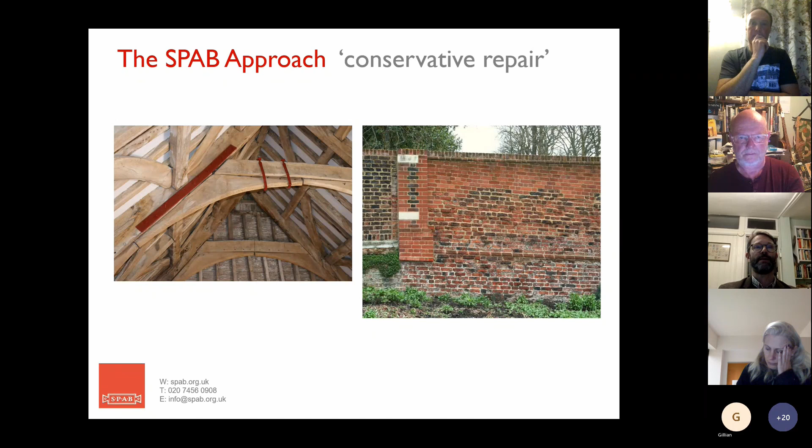So let's move on then to the Old House project. This is just a quick introduction from me, and then I'll pass on to Johnny to explain about some of the actual work that's been happening over the last couple of years.

So in the past, the SPAB was the owner and repairer of many historic buildings. Just one example is that on the left - you may well know it extremely well or have passed it on a regular basis. It's the Wealden Hall restaurant at Larkfield, repaired by us, but sold on many years ago and now a thriving restaurant. But in recent decades we moved away from this kind of activity. We were focused on advice giving and on training activities, and this had rather taken us away from the practical doing of things.

So in 2016, the SPAB took a significant strategic decision that it wanted to take on a new demonstration project as a means of showing what we were all about. This was the catalyst for a 2-year nationwide hunt to find the right building until we finally alighted upon St Andrews at Boxley. After a lot of thinking and some careful valuations on both sides, we agreed a purchase price of £60,000, which was either a lot or a very little depending on your perspective. But it was essentially a fair price, agreed by both parties as the right money for the building.

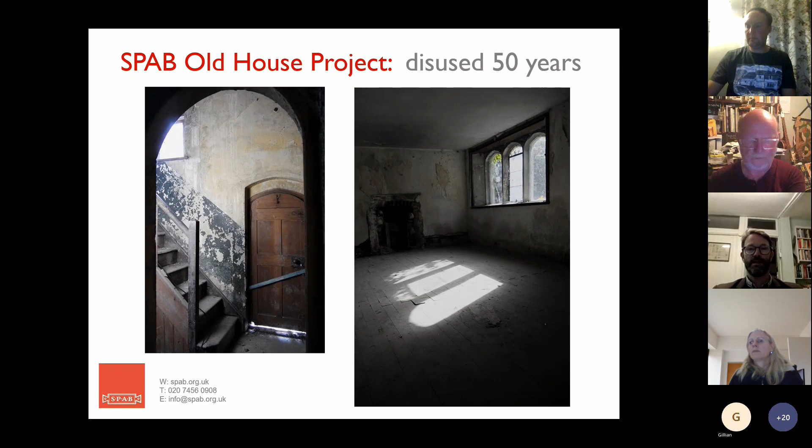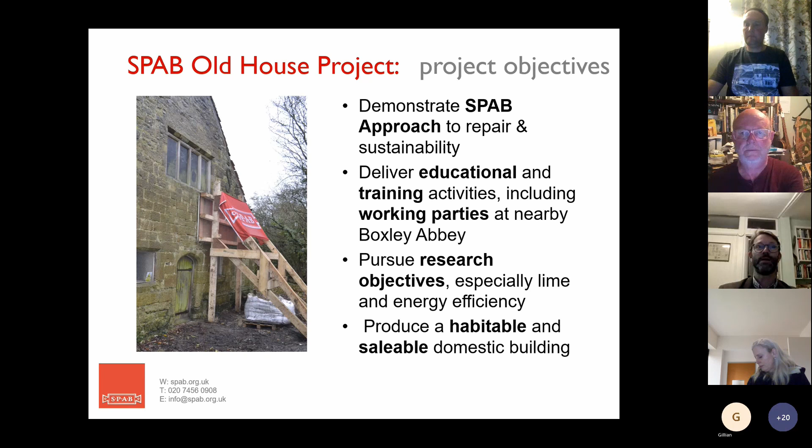So our objectives were to deliver several things over a 5-year period. Fundamentally, we wanted to demonstrate the SPAB approach to building conservation and sustainability too. We wanted to do as much educational work as possible, and that's where things link in with the working parties at Boxley Abbey. We wanted to pursue research objectives, especially around lime production and energy efficiency. And ultimately, we had to produce a habitable, saleable building in order to get the Society's money back.

So just a quick bit of context. St Andrews stands very close to Boxley Abbey. The precise relationship between the Abbey and St Andrews Chapel is still being explored, but it seems clear that there is a very strong historical link.

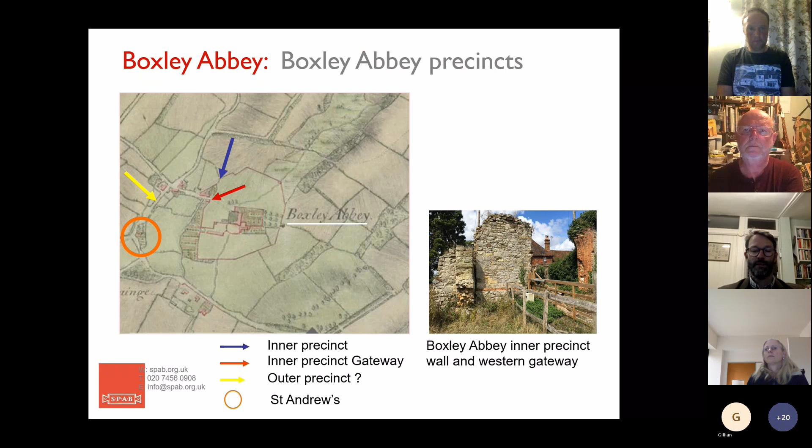Quite likely, Debbie may like to comment on this in due course, but quite likely is that the chapel was a reliquary building holding a saint's relic linked to pilgrimage, which was central to Boxley Abbey's activities. For me too, you can see the chapel ring there in orange on the left-hand side, and the blue arrow indicates the surviving inner precinct wall, but for me, very probably St Andrews stands on the line of the outer precinct and former outer precinct of the Abbey itself.

As you may well know, at the dissolution in the 1530s, the Abbey passed to the Crown, and shortly afterwards was handed over to courtier Thomas Wyatt, who lived, of course, at nearby Allington Castle. So a very obvious reason for him to want to acquire the Abbey's lands for his family.

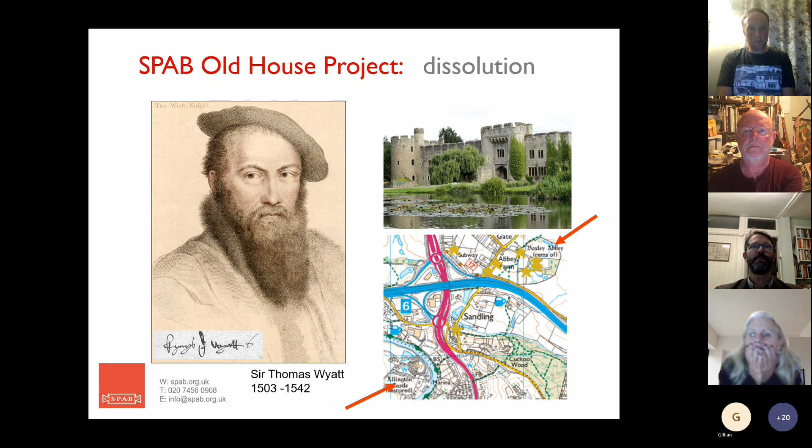Then followed a long period about which we're still trying to find out more, but pretty clear is that St Andrews just was part of the Boxley Abbey estate, and this position continued right on through until the late 1960s, when the chapel was finally sold out of the Abbey's hands.

So during our 4 years of ownership since 2018, we've done as much documentary research into the building's history as possible. In particular, thanks there go to Debbie Gocher, who's been an enormous help to us. But we've also drawn on local expertise. A historian called Robin Ambrose has been extremely valuable, and also others from KAS have contributed a great deal too.

So that's the background. I shall now hand over to Johnny, who will talk you through some of the investigation and repair work and planning and thinking that we've done to date. So, Johnny, I'll click forward the slides when you tell me to.

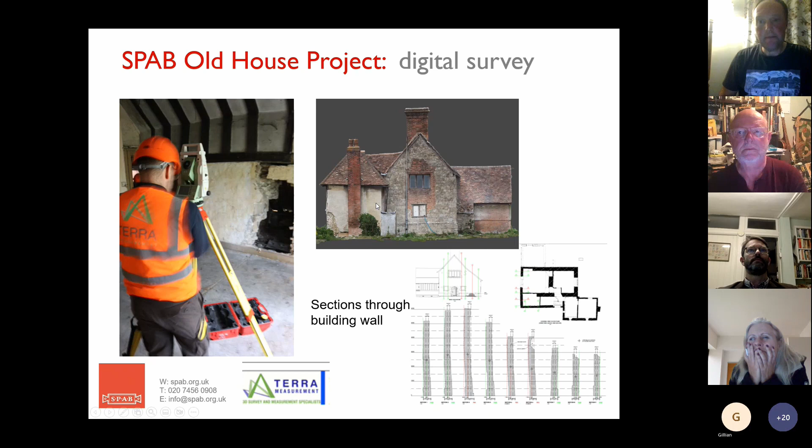Other people that helped us right from the beginning included Dr. Martin Bridge, who I'm sure some of you know. He's a dendrochronologist with a huge amount of experience trying to date buildings, particularly timber frame structures, which is what he did at St Andrew's Chapel and the Old House project. Initially he came in and undertook a dendro survey on the areas he could tackle, but having got a few question marks, he came back when we were undertaking repairs to the roof, and that opened up a whole new world, and galvanized some of our thinking and gave us a lot more information to work with.

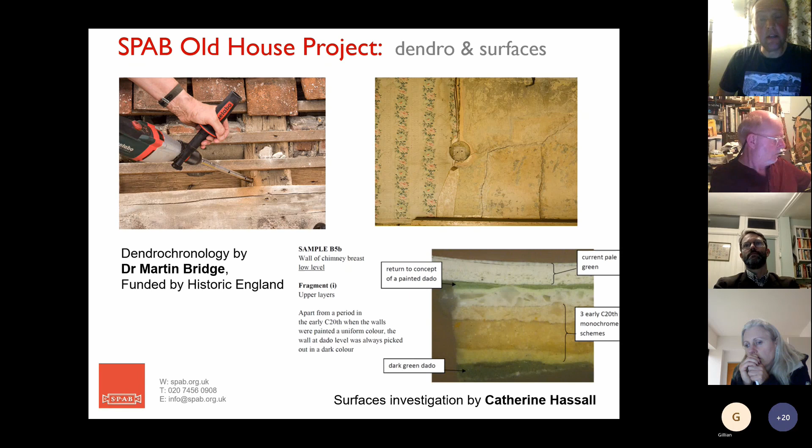We also had other people involved who looked at the internal surface finishes, and Catherine Hassall was the lady involved there, and it was fascinating to understand how many times and how often and when the surface finishes changed. As Matthew showed in the particulars and auction particulars, we think a lot of money was probably spent at the end of the 19th century, but after that there wasn't much change. So we're taking on a building that hasn't been lived in for 50 years, but is actually decorated in a way that was coming from the Victorian period, and it was a real time capsule in that way.

Next slide, please, Matthew. One of the first bits that we tackled in physical work was the roof. As William Morris says, fix a leaky roof, and that's exactly what we did. We had actually set aside money to renew the whole roof. We thought it would possibly need that when we were first looking and undertook a condition survey.

But through further investigations and understanding the building, we realised that the roof you could see in the early photos, with the family standing in front of the building and beautiful shots of St Andrew's Chapel in the background, was actually perfectly okay, other than where trees had rubbed against tiles and where repairs had been undertaken mainly due to vandalism. Manufactured tiles had been put in place of handmade tiles, and they had started to break down and delaminate quicker than the handmade tiles. So leaks occurred, and that rotted some of the roof structure, but really it was only very small amounts.

So we actually undertook trying to make the tiles ourselves using the clay from underneath the site. We realised when we needed 3,500 of them, mainly for the new post office roof, that was going to be impossible. So we went to William Blyth's, who are up in Hull. They have a 130-year-old coke-fired kiln, which is a very traditional way of burning tiles, and using their clay we produced 3,500 tiles. We had people sponsor a tile through the SPAB, and very gratefully a lot of wealthy members, I suppose, were able to help us. £25 was what you could pay for a tile, but some people paid nearly £2,500 for a tile. So that really helped us with the repairs.

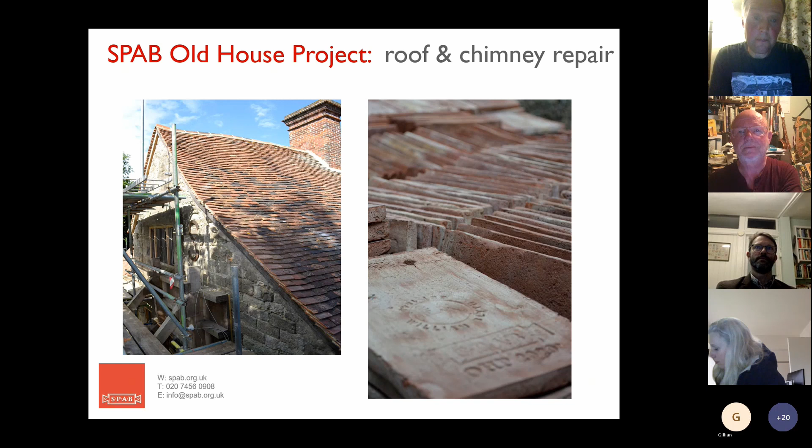Next slide, please. As you can see here, this is the roof works beginning. As Matthew mentioned, one of our ideas behind taking on the Old House project is education and training, so we very much wanted to involve as many people as we could, from students right up to the most experienced of building people. We had an extra wide scaffold which allowed that, and we also had access via a system of poles running along the ridges, which ladders could move across without touching the roof, doing as little damage to the roof as possible, but allowing access to the whole roof for repairs and for investigation purposes. The scaffold was up for a whole year, right through the process of repair and following as well, so it was a great education and training aid for us.

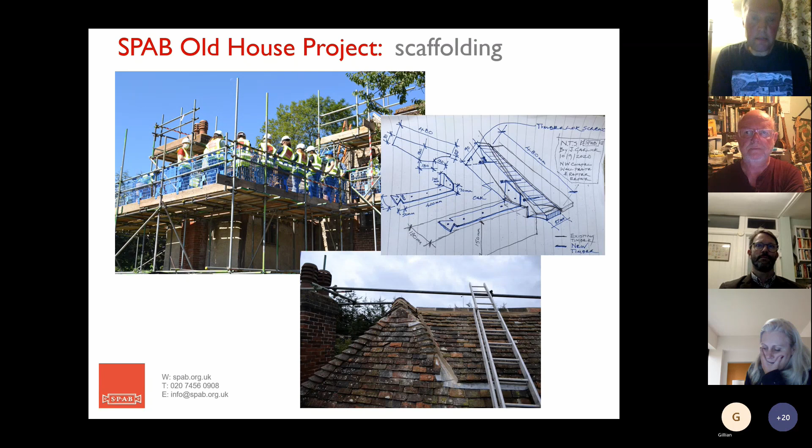The other aspect we undertook was analysing the mortar, both at Boxley Abbey and at St Andrew's Chapel, which we discovered to be the same. It was a feebly hydraulic grey chalk mortar taken from the North Downs, mixed with a building sand, a very soft sand that had been taken from the other side of the site where there is a sandstone ridge.

We did lots of trials with this mortar, and we felt that we could increase its strength without reducing its breathability. We were very lucky to be given 2 million tonnes if we wanted it, but we only needed a couple from the Oxted grey chalk quarry just off the M25. A lot of you probably know it. With those couple of tonnes of grey chalk, we then burnt it in a lime stabilised soil kiln, which is still on site and actually in use tomorrow.

That provided us with some quicklime, which we can then hydrate and then mix with the local building sand, which the Cistercian monks used, but also added in a little bit of crushed Kentish ragstone, one to give it a little bit more strength, but also to identify where we had been in the building. So as you can see here, we did lots of chimney repairs where it was needed, left the mortar where it was perfectly okay, but just where bricks and mortar had fallen out, we needed to fill it in and point it up with our own mortar. It's worked incredibly well, as it's feebly hydraulic. It's a pretty tough mortar, but it also, as I hope you agree, looks nice as well and matches in with the original Cistercian mortar that they used.

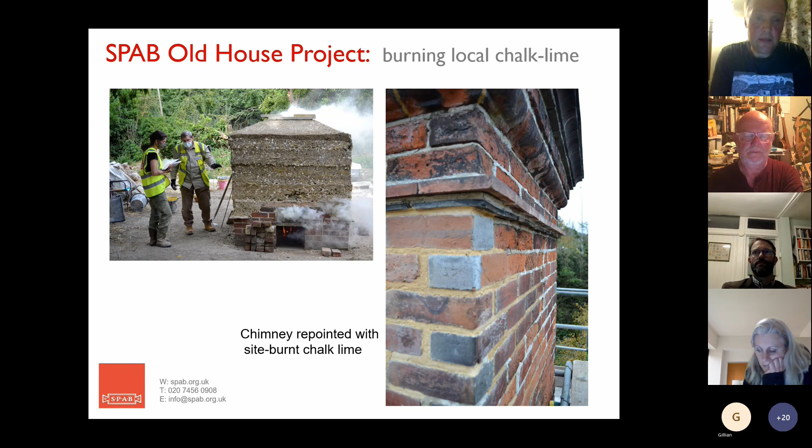Not just grey chalk have we tackled in the SPAB's OHP kiln, but also ragstone. Now the building, St Andrew's Chapel, is built from ragstone, a very common building stone, but very rarely was it used as a binder, if ever, mainly because it was impossible to crush it down to a size which you could then burn comfortably. So it was mainly just known as a building stone. But where we have Kentish ragstone on St Andrew's Chapel which needs repair, as in the surface has delaminated away and become quite soft, we needed to build it up with a mortar repair that was compatible. And what better way than to repair Kentish ragstone than with Kentish ragstone?

Now, these slides that you can see with the red banners on them are taken from our videos that we have produced over the last few years since working at St Andrew's Chapel and at Boxley Abbey. So please go and have a look on YouTube, under SPAB YouTube, and you'll see the whole process of us making the kiln, burning the stones, and then putting them on the building as trials.

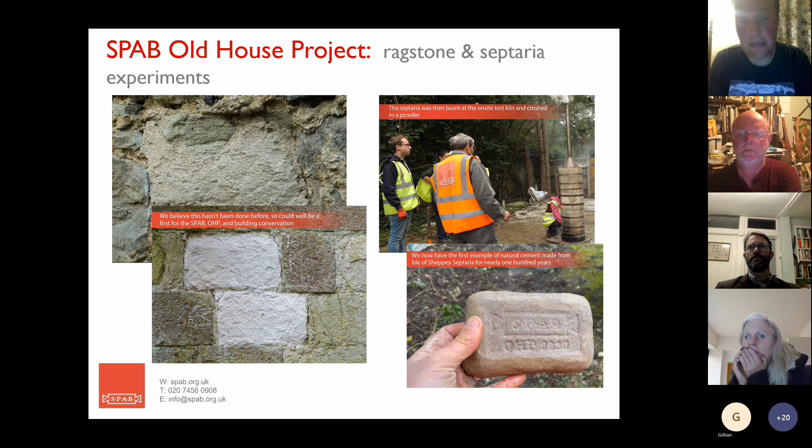Another fascinating side of our lime research and kiln research is that we had a go at taking some septaria off the beach at the Isle of Sheppey and burning it, crushing it down, and then making ourselves some natural cement, which you can see in the bottom right hand slide there. First time in a long time that had happened, and we hope that we can utilize some natural cement in the building as well, going forward. We feel that it's another local material that's been forgotten and a little bit misunderstood, and we wanted to make people more aware of the benefits of a natural cement, or a Roman cement, as many people might know it as. Next slide, please.

When we took St Andrews on as a project, we always knew that there was a bit of an easement issue across the site. We thought at first it might have been due to the M20 or Grange Lane or something along those lines, and then slowly, after we got the keys, discovered that we had a huge gas main that ran across the south side of the site, which pretty much fed most of Kent with gas. And the first day we stepped on site, the gas man turned up and said, 'Don't go anywhere near it.' Of course, that suddenly scuppered a lot of plans that we had for that part of the site.

But anyway, we took it on the chin and worked with SGN, who initially said don't go anywhere near the pipe work. But our architect said we really need to cross over it to form a driveway onto site, as the Boarley Lane entrance is too narrow and dangerous to access. So we wanted improved access from Grange Lane, which meant two years of negotiations and drawings.

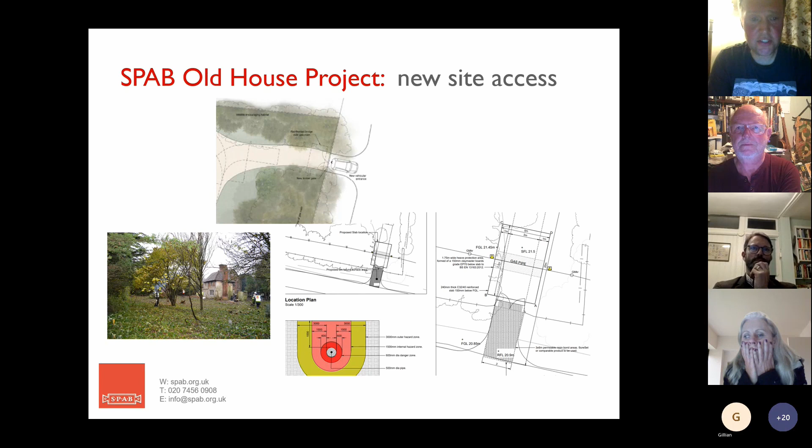The drawings were put together by the 36 Engineer Regiment in Maidstone, who used it as a project to design a reinforced concrete bridge to span this pipe. We got it installed with help from local volunteers and specialists we know, and had a lot of fun doing that. It now gives us access to the south of the site, and as you drive on, you get a beautiful view of St Andrew's Chapel in the distance. It was all worth it - just something we weren't expecting to do.

One thing we were expecting to do was deal with the fact that the M20 is 100 feet from the site, with all the noise and pollution that comes with it. When we went for planning application, Maidstone Borough Council were keen that we got further research undertaken on the effects of sound and air quality on our building, and how that would affect anyone living there, which hopefully someone will.

We were very lucky again - another local to the Sandling Boxley area came forward and offered to help. After a few conversations, we realised he worked for Socotec, a massive engineering firm, who took St Andrew's Chapel under their wing. From a structural monitoring side, soil investigation side, and environmental side - air quality, sound quality and acoustics - they've helped us.

On the left hand side is the original building, which gives some relief to the sound from the M20 on the north side. The other building on the right is a garage we're hoping to put in - it's a proposal we've got planning for now, but it doesn't exist yet. You can see there's a little bit of sound relief behind that.

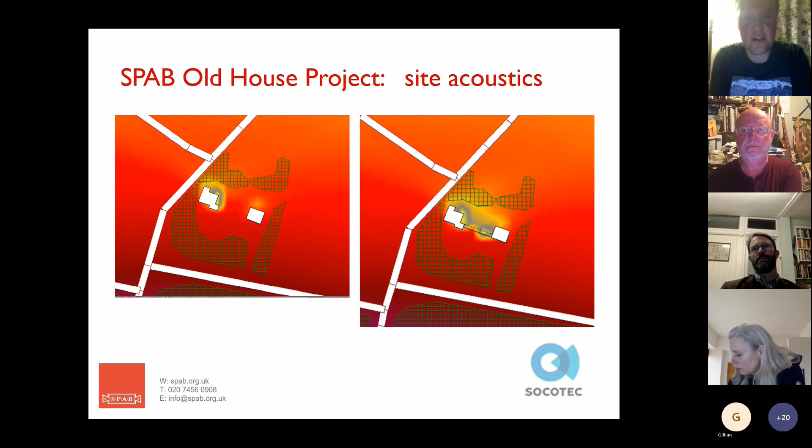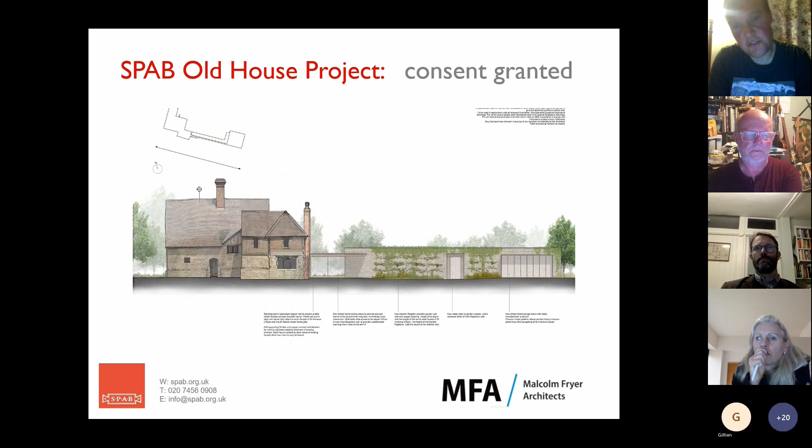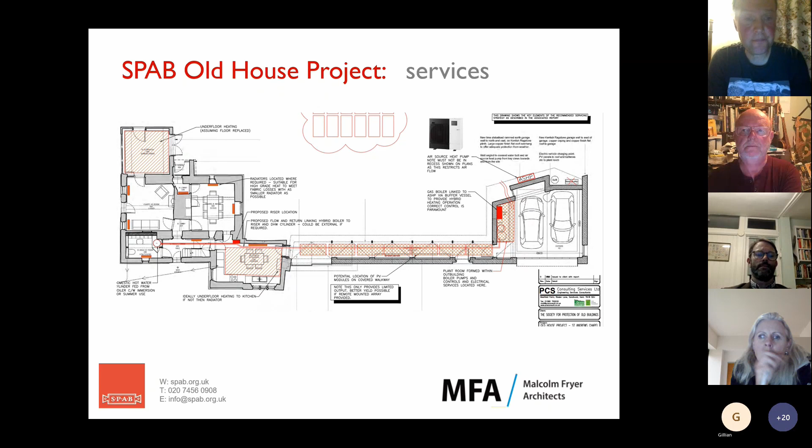We are looking at increasing the solar array. We've got a discussion with the services engineer very soon about exactly what we're going to put in, but we really want to make the building as self-sufficient as possible, utilising the south orientation of the site - possibly solar panels, a biomass boiler, or a gas boiler, and particularly air source heat pumps. We want to limit the effect of the services on the historic building, but make it sustainable and livable - a nice warm building.

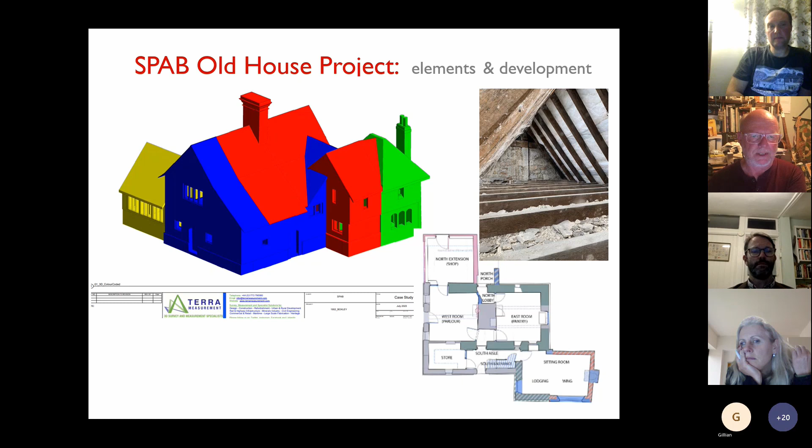If we go on to the next photo, please, Matthew. This shows a little bit more of the work that's been going on in the background. This is essentially what Martin Bridge has been looking at as the dendro specialist, funded by Historic England, looking at the building itself. These are the areas he was looking at, again with the same kind of tone - the primary elements, trying to get dates for the initial structure of the building, then the theoretical addition of this little square element on the southeast corner, and subsequent additions, the slightly later phases, so we thought, of the building.

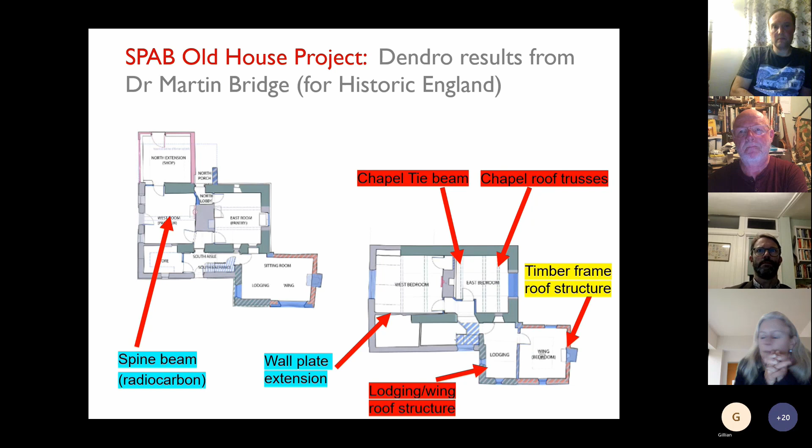Next slide, please, Matthew. Thanks. So initially we got the dates back. In fact, in the very first stage of the work that Martin did, he was able to successfully date the primary element of the structure. It's worth noting, as we go through these slides, it's a grade 2 star listed building. The listing describes it as probably late 15th century, with post-dissolution additions of various dates. It was rather good to get this date back of a felling date, let alone just a range - a felling date of 1484 for the primary structural timbers of the roof itself, of the chapel element of the building.

You can see, even in the plan there, the thickness of those primary walls exactly there. But you can also see that on that plan there is a big gap at the west end, which Matthew is showing you now, and the south wall, exactly where the pointer is, a little bit shorter than the other one. The north wall - we'll come back to that because it's got quite a few ramifications for the overall interpretation of the building. Next slide, please.

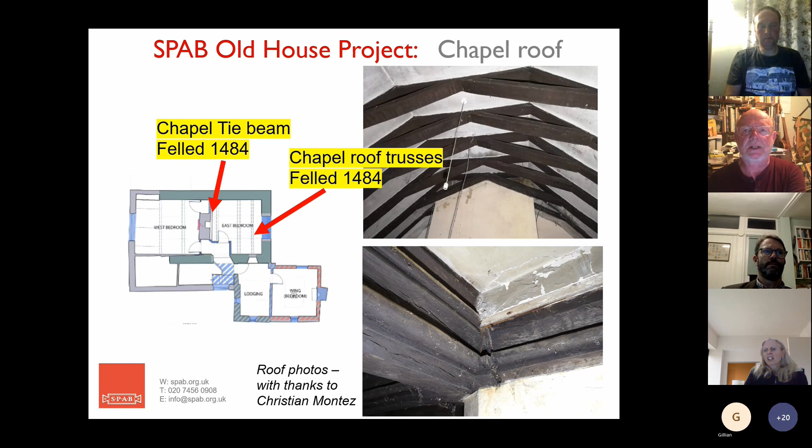When we had the scaffolding up in 2020, Martin was able to come back and do much more extensive sampling, which was invaluable in its own right, giving him a lot more dates. It also helped him go back to the first set of samples he'd taken a couple of years before, and he was able to use both sets together to get better results from the first set as well as these new ones.

So the timber framing of this, we thought and still do think, was the primary element, perhaps the priest's lodging for the reliquary chapel itself - the priest who would serve the chapel and keep watch over it. We didn't necessarily have felling dates, but we had a good range of dates indicating it was, at the very least, broadly contemporary with the chapel element. The date ranges of the timbers fall in the later 15th century, perhaps straying into the 16th, but broadly speaking it's contemporary with the roof of the chapel - and I say 'roof of' advisedly, for reasons we'll come on to.

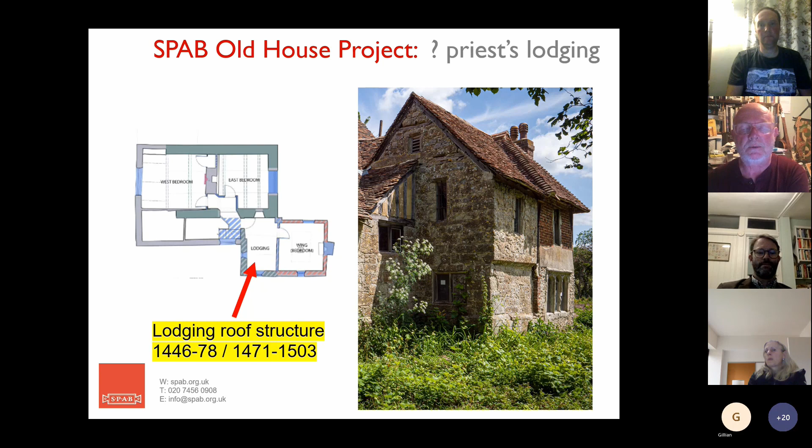It was when Martin got to the timbers of this added-on framed range at the southeast corner that things started to get really interesting, and we're still working through the implications. Although he got a range of dates rather than an absolute felling date, it seemed quite clear that the dates for this building were actually earlier, full stop, than the primary element - the chapel, and indeed the priest's lodging, if that's how it did function - which has set us all sorts of challenges.

We've been looking at whether the timber frame might have been reused in some way. I don't think any of us quite believes that, because it's not easy to reuse a timber frame from a separate building and import it into an existing one - it just doesn't work like that. We've come round to the idea this is genuinely an early part of the structure, and how we square the circle of a primary chapel being ostensibly later than a framed bay, which we thought was later than it, is slightly open to discussion, to say the least. I have my own ideas, I'm sure we all do - we can come back to that in a moment.

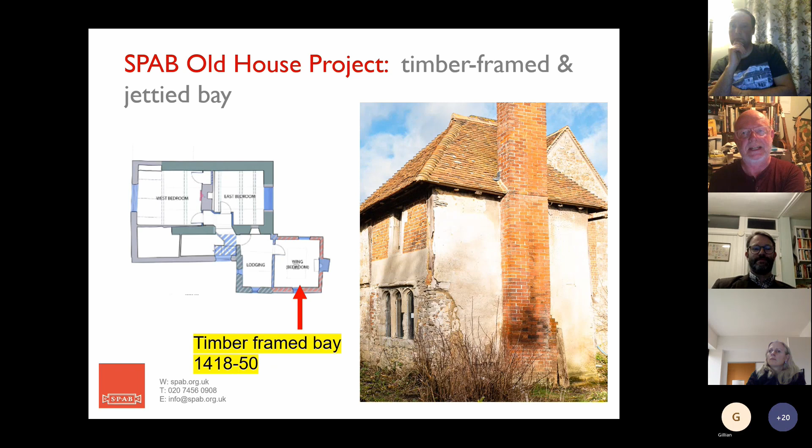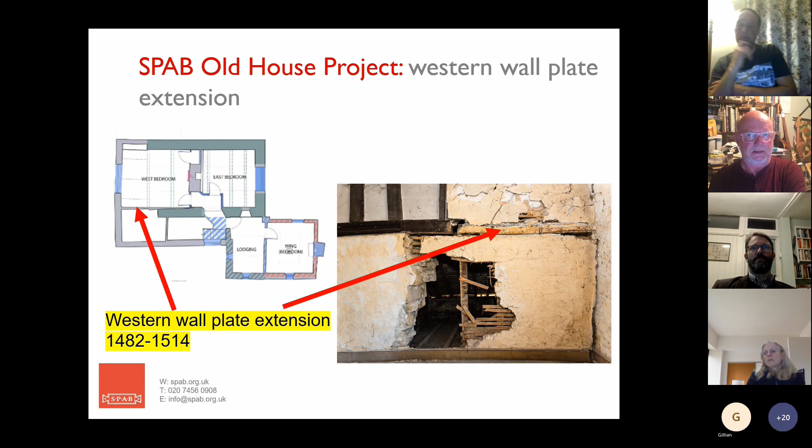Another surprise was when we looked at the evidence for the extended element - this bit where part of the building was added to. That didn't behave itself. We were fairly firmly in our own minds thinking this was a post-dissolution extension, for the phase when it becomes a private, broadly residential property. But with the date range in mind, rather than an absolute felling date, it's quite clear that the timber we've been able to date definitely falls within the medieval period. Is that a reused timber? Well, possibly, but the date we have is the date we have - all sorts of interesting conundrums for us to work through.

One of the final bits of the jigsaw was getting a date for the spine beam on the ground floor, one of the few parts of the extended, reused building which we were quite confident was post-medieval in date. For various reasons it wouldn't date by dendro, but Martin did get a radiocarbon determination from it, which shows it's in the late 17th or very early 18th century. This supports the idea that the insertion of a floor into the building, and probably the chimney stack as well, is substantially post-dissolution in date rather than just slightly - so that at least behaved itself quite well.

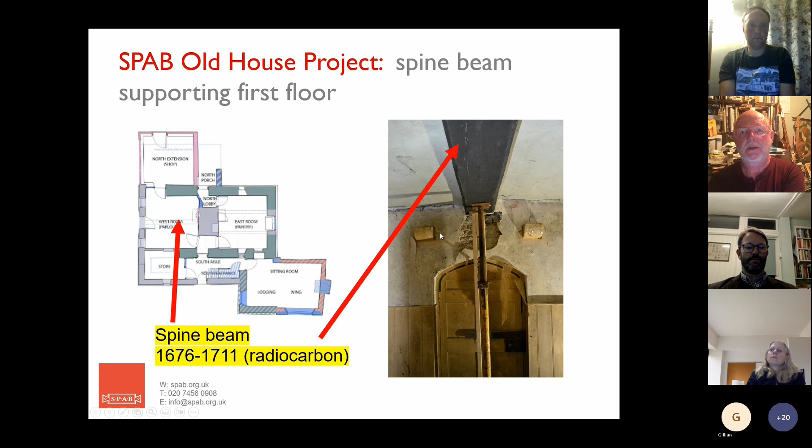Moving on from that, obviously that's just been one part, and alongside all the dendro dates there's been continuous survey work going on. At the moment, work has been happening in the last few days on further opening up the interior of that same southeastern corner of the building, with fascinating results which I haven't even seen yet, let alone can interpret for you. But it's a building which is slowly but surely unfolding its secrets before us.

And also a series of test pits - I think we're up to 19 test pits and one large trench so far. The geophysical survey on this site wasn't tremendously successful, partly because it had only just been cleared at that stage, so there was still quite a lot of metal debris on and close to the surface. It was also an extremely dry time, and the resistivity didn't really respond very well to that.

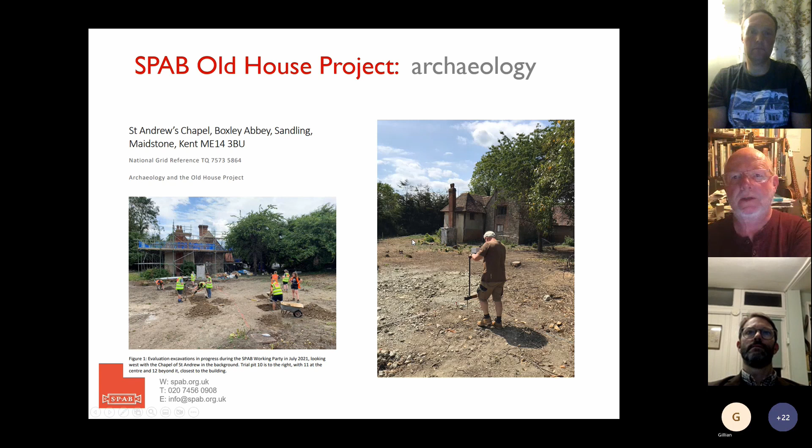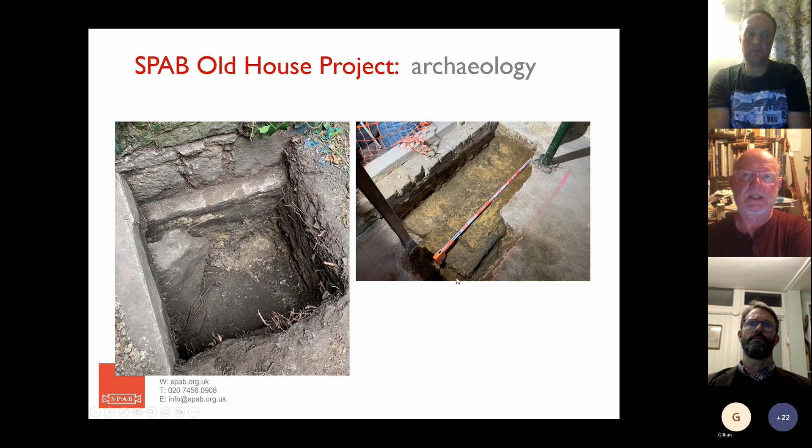Next slide please, Matthew. The work on the entrance off Grange Lane that Johnny was mentioning earlier on involved me as well. We had some really quite fun bits and pieces from that, though generally speaking not a great deal in archaeological terms. There was a gravelled surface which we've picked up in several of our excavations now in this area, which might be natural or might be a deliberately laid surface, but is certainly a major feature of this part of the site.

I have a feeling that some of the animations I've put in here are disappearing, so I'm going to say a little bit more about this rather than... oh, there it is.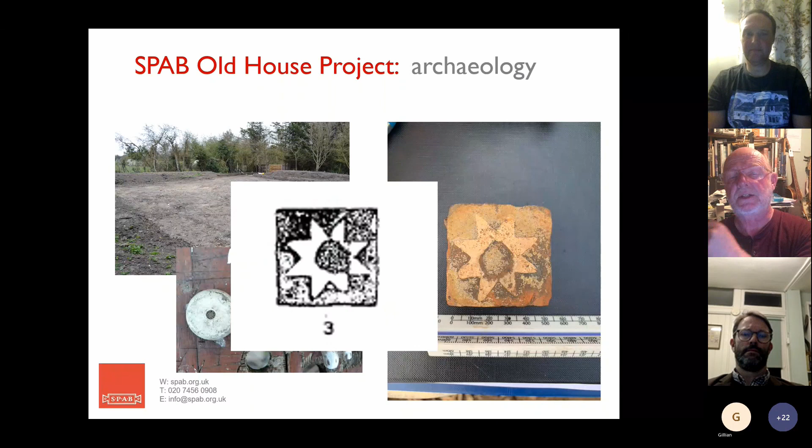So next slide, please, Matthew. That's my element of it. Matthew, I don't know if you want to take over these next slides, or keep going, Graham? I think in the interest of time it's best one of us does it, and I'm really interested to hear what you're going to say. So give us your thoughts, and we can debate them later.

If straight on to the next one - I did notice one of the photos from a previous slide had disappeared, so this is the next one, which has some animation. We'll just have to hope the animation works.

It was mentioned earlier, I think Matthew was talking about how the chapel itself functioned, how it operated with the main Abbey site. It's long been a thought on many of our minds whether it was in fact not just a chapel, but an outer gatehouse chapel. That concept had eluded us completely - we weren't finding good evidence historically, Debbie may correct me there, or archaeologically in any of the work we'd done.

Until we dug one particular pit this last summer as part of the working party, and found this really nice, quite chunky wall in big Kentish rag blocks, very similar to what we know is still there in the chapel. We started to wonder whether we're getting the first trace of either the outer precinct wall and/or perhaps a gateway associated with it, because as you can see here, there is a very clear end to this structure.

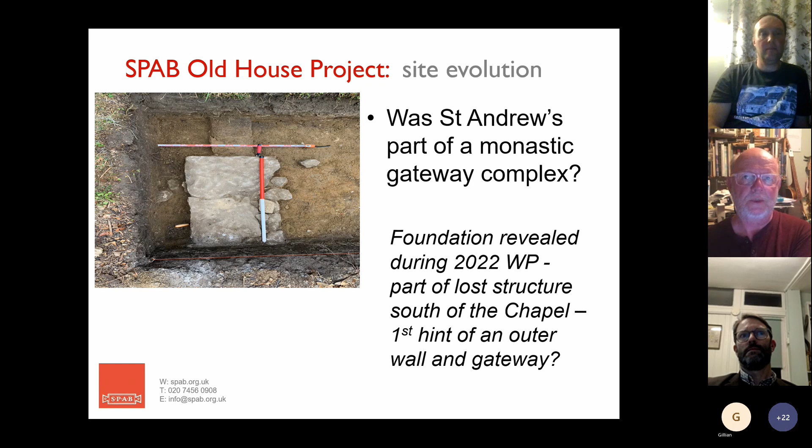This is only one small pit that we dug. We don't know whether it's a genuine gap, whether it's something that's been robbed away, whether we have a gatehouse or quite what we have, but it's the first tantalizing evidence for it. And hopefully, if the photo will now appear magically, there it is.

That shows you the direct relationship between the two. This is now that same test pit looking back towards the chapel itself, with our newly found wall very much in its context, parallel with the south side of the building, and with that possible opening where the ranging rod and scale tape are on the left hand side, aligning quite nicely with the priest's lodging, and with the doorway between that and the chapel at ground floor level.

So, very early days, something we're hoping to do more work with. The reason for digging that pit in the first place is that this is where there's going to be a drainage feature, a little swale or gully, to catch potential flood water, which is one of the issues we have at the chapel moving forwards. That swale is still going to be there and will need further excavation without damaging this particular structure. That will stay, but we will hopefully see more of it and have a much better understanding of how it fits into the overall picture.

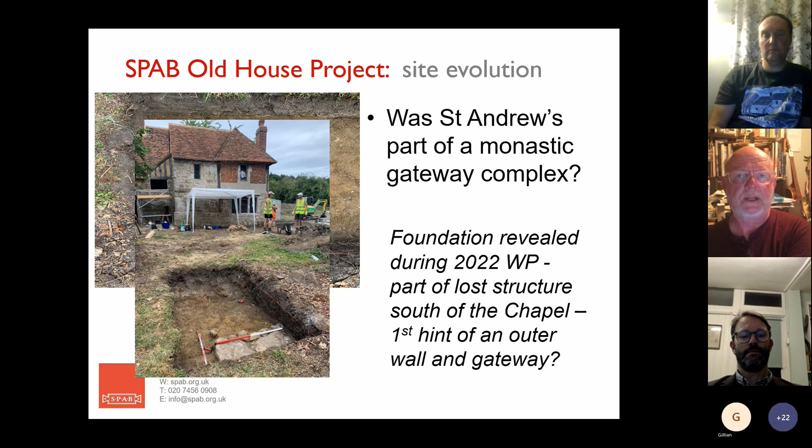And I think that's probably my bit so far. Oh, okay, carry on.

Just in terms of how it all fits together, we now have the timber frame bay, as this slide shows, on the southeast corner of the building, which in terms of dendro is definitely the earliest part of the building we have so far. The chapel itself, or at least its roof, comes in slightly later, at the end of the 15th century. I do wonder personally whether it's actually a re-roofing, and that the envelope of the masonry structure is actually slightly earlier, so we could still have a contemporary set of structures with the timber frame bay going with the stone masonry. But without doubt, in terms of the dendro of the timber structures, the roof over the chapel is that little bit later than this timber frame section.

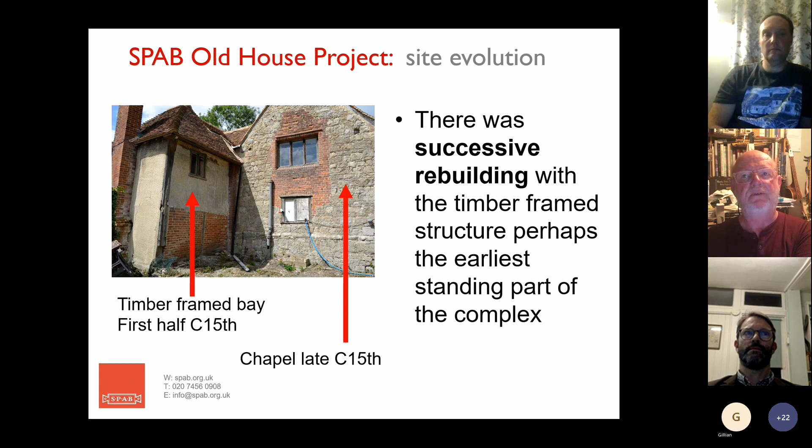Moving on. We then get the extensions themselves, which we still see as being post-medieval rather than medieval. We only have the one timber so far, which has returned this apparently late medieval date. That could very easily be a reused piece rather than an entire frame, which plausibly I don't think could be reused.

What is interesting about this part of the building, this extension, almost whatever its date is, is that it's very clearly reused monastic material and of a very high quality indeed. The ashlar masonry there is actually of higher quality than the stonework of the chapel itself, in my mind. It's very good masonry, and it's slightly hard to work out exactly where it was coming from, not least because when you look at what's left on the abbey site itself, there's nothing of this quality surviving above ground anywhere. So it's still quite a challenge to work that one out.

But again, all of the excavations we've done so far have shown that the west wall and most of the south wall, what you see on the main photograph here, has very poor foundations indeed. It's just a single course, resting not on good bearing geological ground, but on relatively speaking what an engineer would term made ground. So if it's shown, as it indeed has, some structural stresses in the past, it's not necessarily that surprising. The amazing thing in a way is this massive structure of this extended part of the building has survived with such apparently poor foundations under a large part of it.

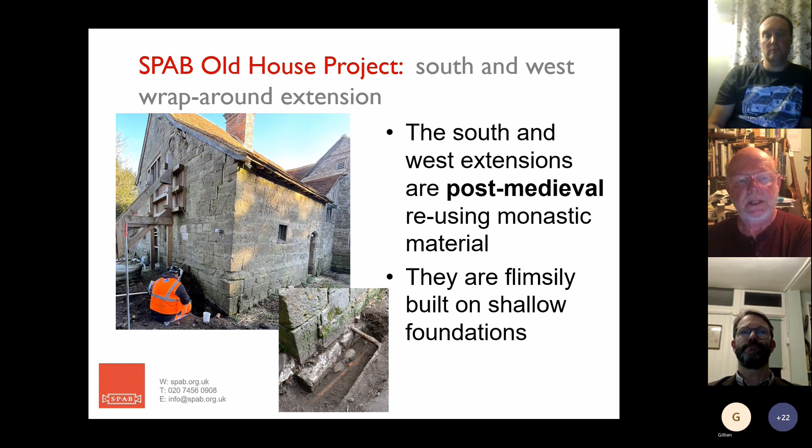Next slide, please. The chimney stack and the internal first floor, we know were introduced around about 1700, from the dendro dating, and indeed from what we would expect from the overall character of the masonry and the use. But perhaps following on from a period when the interior of the building was in effect an open hall, whether for domestic or otherwise use at this stage, we don't know.

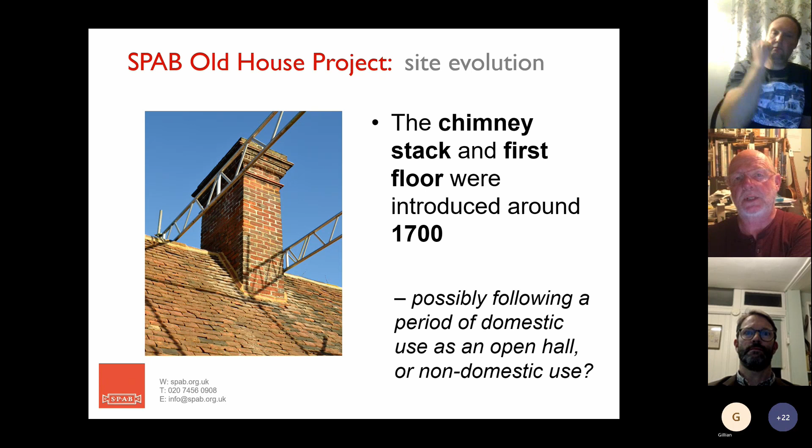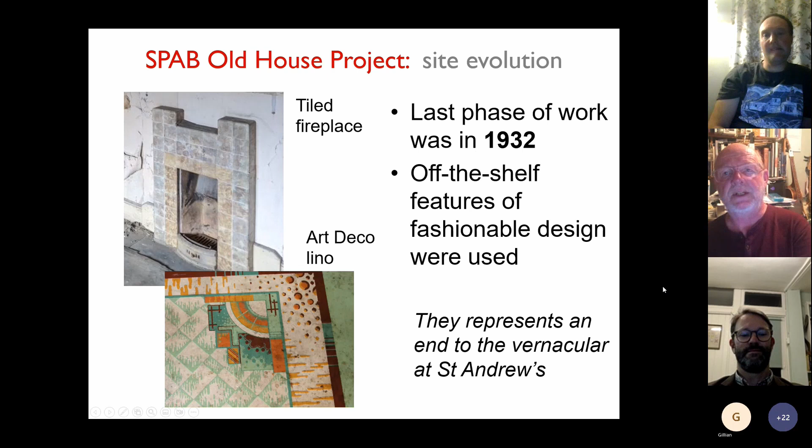Next slide, please. And then there is a bit we haven't really talked much about, the small timber framed element on the northwest corner, which was erected probably just before 1900, so a late 19th century addition. And then the latest phase of internal use, the evidence for which is all still very much there, is this slightly unusual early 20th century stuff, the fireplace, and in particular an amazing collection of Art Deco lino floor coverings, which are a challenge in their own right. So that brings the building up to almost the date when it fell out of use, around about 1960. Next slide, please.

And perhaps you might want to just wrap up.

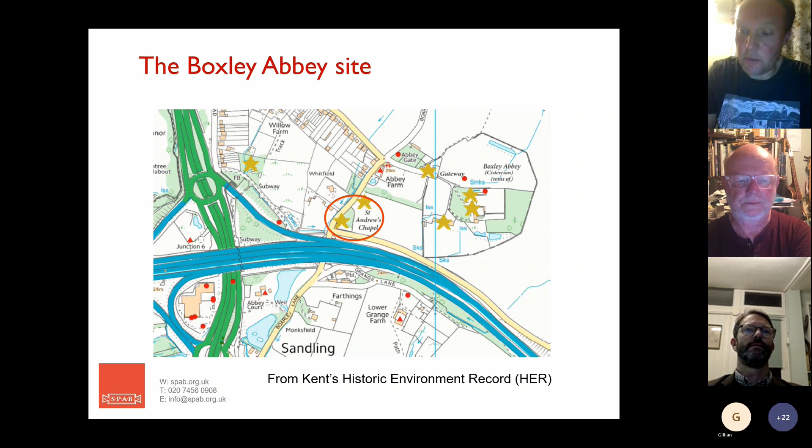This is the plan of Boxley Abbey, the tier-shaped inner precinct wall there, and St Andrews indicated with the red circle, with the M20 100 feet away. So it's quite a nice site, but a large site for us to work on, and has many interesting buildings and areas to it, which we've been investigating over the last, well, since 2019. Next slide, please.

So this is the entrance to the gatehouse of Boxley Abbey, and at every working party we fix our flag close to the entrance as we possibly can, to let everyone know that we're here for the week.

And it's a gathering, as I say, up to 100, 150 people, with visitors coming along as well. But generally it's a mix of students, homeowners, professionals, craftsmen, builders, of varying kinds. It's lovely because you can have people who are highly educated working with people who are just starting their career, and everybody gets on, and it's just fantastic.

So this is our base control, where everything is discussed, and we have our briefing first thing in the morning before everybody then goes off and does their little bit of work around the site.

So one of the areas of work which we have been working on is the garden wall at Boxley Abbey. It's a Kentish ragstone wall, very similar to the one at St Andrew's Chapel. And because it's listed rather than scheduled, it was an ideal first place to practice some of our techniques on.

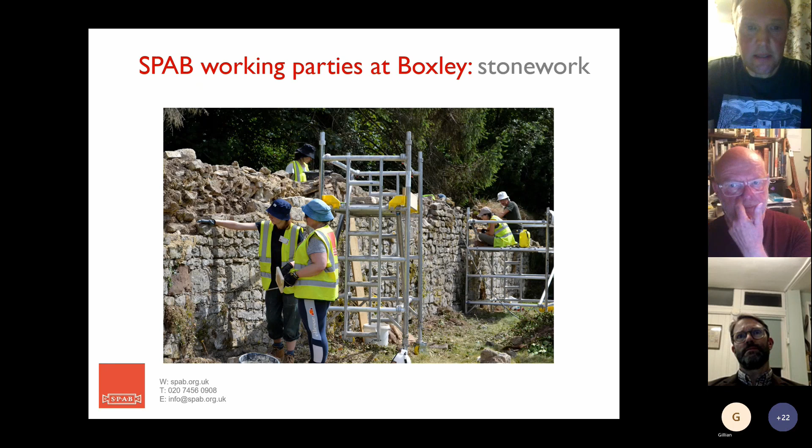So we have other areas of the walled garden that we worked on, brickwork, standard sort of brickwork in the left-hand slide picture, and then we have some gauge brickwork in the right-hand pictures.

We're very, very lucky indeed to have some incredible specialists that work with us, alongside all of the KAS and MAG and KURG and HAARG specialists who do deal with the archaeologists, working alongside Graham. We also have specialists in timber framing and brickwork, as with Lynn here, in the mortars and burning of lime, and everything, basically surveying of every type. And it's a fantastic group that give their time up for volunteers, who are the guys in the yellow tops, to be able to work alongside.

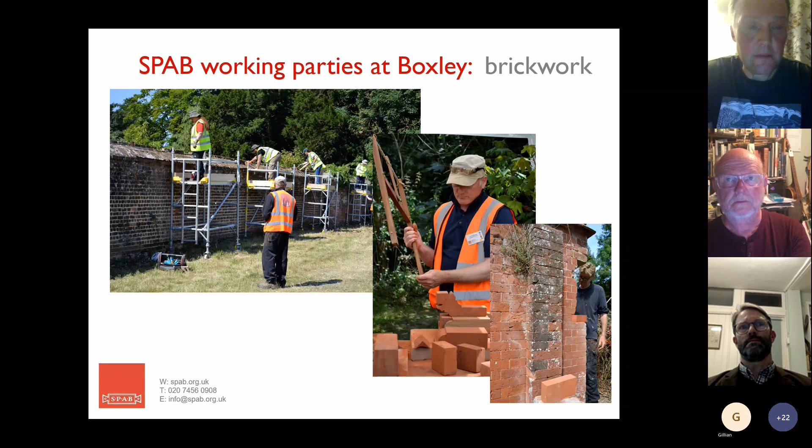As you can see here, this is the hospitium on the left-hand side, where after quite a strong breeze or storm, a number of the Kent peg tiles had slipped, and therefore we got a genie cherry picker in to repair that this summer.

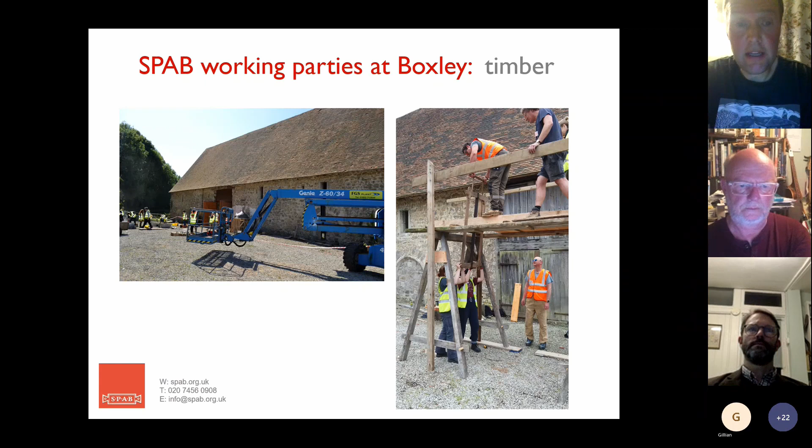But we're using modern technology to help us repair the building, but also the most traditional techniques as well. As you can see on the right hand side here, we've got John Russell and his team pit sawing one of the beams, which then went into the hospitium to repair the ancient well, Cistercian floor. So that was a really great repair, and you're more than welcome to come and see that.

Okay, I'll pass you over to Graham again, who will talk about the archaeology, which has really just brought the working party to life, and we're really grateful for it. So over to you.

Thanks, Johnny. One of the things Johnny's just mentioned there a couple of times is the scheduled area. Many of you will already know that Boxley Abbey, the entirety essentially of the precinct area defined by that outer wall, is a scheduled monument, so it's very, very closely protected in law, specifically really for its below ground archaeology.

It's interesting that the hospitium is actually included in the schedule as well as being a listed building, whereas for the most part otherwise the listings aren't included within the schedule, but the ground underneath them is.

That has been a challenge for us, in that I think we probably didn't feel in our heart of hearts that we were likely to get the chance to actually do any substantive excavations at Boxley Abbey within the lifetime of SPAB's interest in the site, which will go on for a long time yet. But for various reasons, we have had that chance.

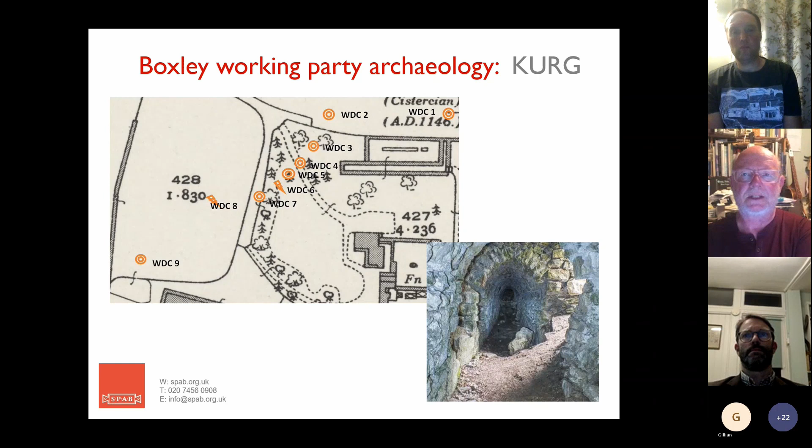More to the point, we - from this point of view, Kevin and Lynn Cornwell particularly, and the Hastings Area Archaeological Research Group, with help from Maidstone archaeologist Stephen Clifton and several others, Nick Hill included - did an amazing array of geophysical survey, effectively covering the whole of the scheduled area where it can be surveyed. There are areas of woodland where you can't survey realistically, but probably 75, maybe 80% of the precinct has been surveyed using both magnetometry and resistivity, and an area outside has been looked at as well.

Next slide, please, Matthew - should have another image. Yeah, here we are. This is Kevin and Lynn's survey work on the core area of the abbey itself, an area Peter Tester had looked at a lot in the 1970s, but you can hopefully see from the geophysical survey that we have a lot more now, particularly in that top right-hand corner, where there is a range of probably monastic phase buildings. To the top left-hand corner, similarly, the area of the walled garden, and the big area on the right-hand side - lots of really tasty anomalies for us to perhaps get a chance to look at in the future. But really looking from that core outwards to cover the whole of the site, in a way that I think is, if not unique, then certainly unusual.

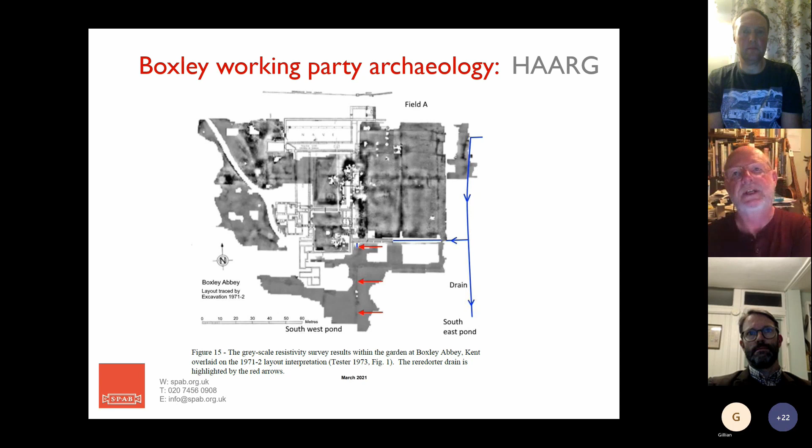I don't think there are many other medieval monastic precincts that have been looked at in the way that Kevin and Lynn have been able to do here. 100% credit to them for the amazing work they've done over a prolonged period of time. A hell of a lot of work has been put in from their and other people's point of view on this particular element, and we wouldn't have got anywhere with the next few slides had it not been for this bit of work. Next one, please, Matthew.

Following on from that, we've also been looking at the LiDAR imagery. This is the 1 meter contour DTM, digital terrain model. There is a 50 centimeter one which keeps the trees in, but this is the one where you can look through the trees, and you can see the complexity of the earthworks, some of which you can actually see on the ground, but a lot of which really only come out with the LiDAR, or more particularly with the radar survey. Just concentrate briefly on the northern area, the top right hand corner of the slide, because this is an area where Kevin and Lynn have got some good results from the geophysical surveys, which should come in now.

Next image, yes, here we are. On the left here, this is for roughly half of that area, the western half. Magnetometer survey on the left, resistivity survey on the right, complementing each other very well, with some overlap in terms of the features showing through, but also some quite distinct differences. But again, you can see that a lot of that represents quite well on the LiDAR imagery as well as on the geophysics. And it's clear that we're getting stratigraphy even in the LiDAR and geophysical survey results, particularly on the resistivity, that area on the bottom right hand corner, which shows up very well on the LiDAR. You clearly have one set of structures and features overlying another.

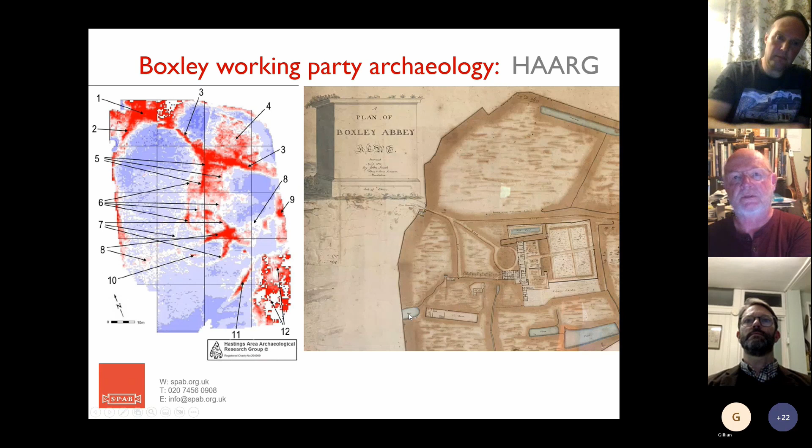In terms of the map, there are a couple of points I want to highlight. One is a little stream channel running diagonally down towards a pond, to the left of the Hospitium, which also shows through on the geophysical survey as feature number 11.

At the top right-hand end of that water channel on the historic map, there is a small building. The internal arrangement of it is exactly the same as an area at the west end of the Hospitium, which is clearly shown as a stable - it actually refers to stables and stable stalls. That little building to the north of the Hospitium must have been a small stable as well, which becomes relevant as we go through the excavation results.

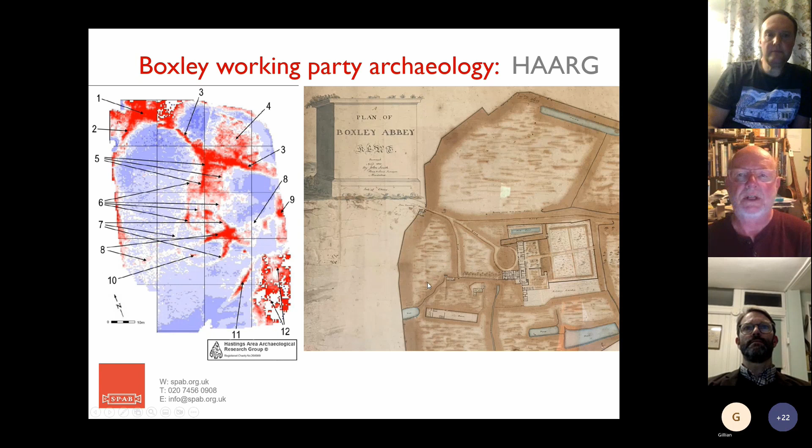Initially I resisted firmly the idea that we'd actually found the circular structure. I wanted it to be something really archaeologically sexy, a damn great Iron Age roundhouse or whatever it might be. I didn't really envisage it being a late post-medieval structure, which is what it is.

The structure - perhaps a slightly loose term for it - we found in two of the excavations, and by extending this trench a little bit, as you'll see shortly, we did find both sides of it. So there's no real doubt that this is that big 23-metre diameter circular feature that Kevin and Lynn picked up in the geophysical survey.

What I think it is, it's definitely very late - perhaps a late 18th, early 19th century structure. I think interpretatively it's actually a horse training ring, which goes obviously with that little stable building, so that someone would stand in the middle with the horses on a long rope and would literally encourage them to go round and round this thing. So that appears to be what that particular structure was.

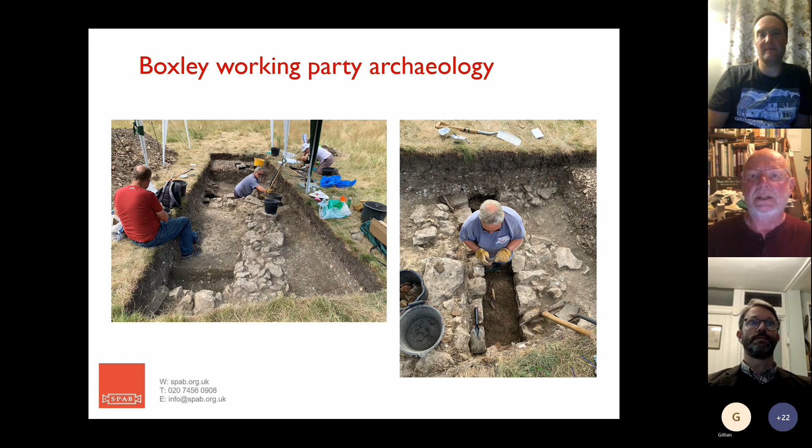And that had a fantastic assemblage of pottery in it, everything from good quality Roman material through a very nice later medieval assemblage, and then in the upper levels earlier post-medieval material as well. So we have the date range: we have what we're pretty comfortable is a late medieval water channel, we have a post-medieval building associated with it, and perhaps even with the channel still being active at that stage - we can't be certain of that - and then the late post-medieval trackway, horse training trackway on top of that.

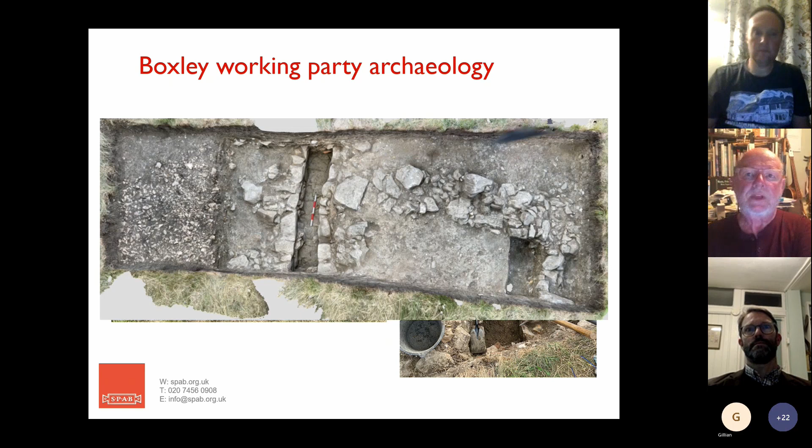So we have at least one building there, but the culvert is that stronger feature running from the north, seeming to carry all the way through, gradually getting fainter the further north it goes, but certainly picking up, I think, all the way through the survey, right the way to the top of the field, and then immediately to the south of our trench 1, turning right and continuing off eastwards towards the Abbey. So an important, obviously, part of the overall water system.